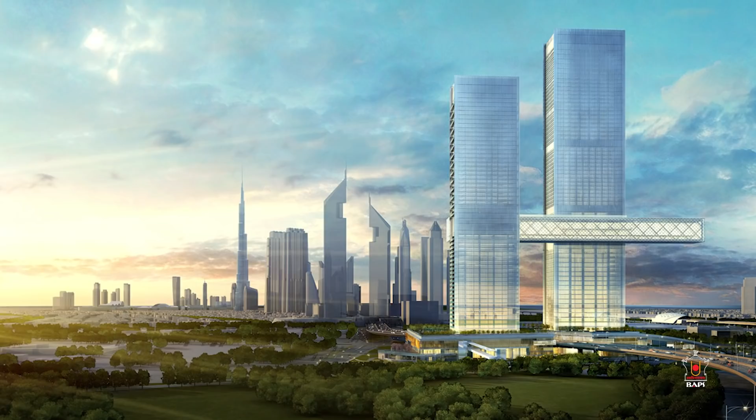The United Arab Emirates is known internationally as a land of landmarks, from the towering Burj Khalifa to the world's largest cantilever building, from cultural landmarks like the Sheikh Zayed Grand Mosque to the majestic presidential palace. The BAPS Hindu Mandir is also destined to be an iconic and historic landmark.

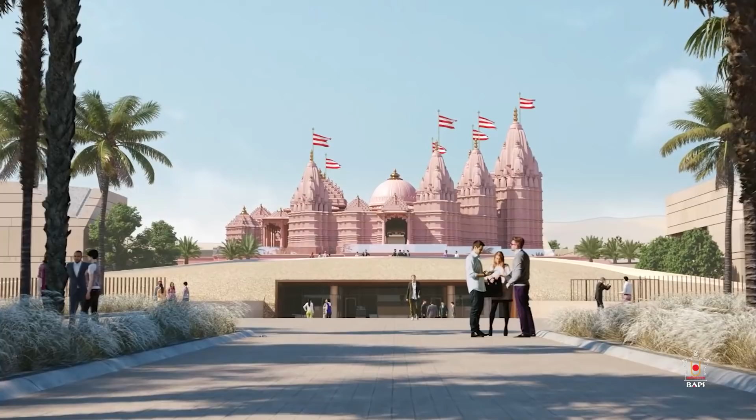The Mandir has countless stories to tell, from its inception and location to the unique fusion of ancient architecture and modern technology. Today, let's explore the foundation story, the story of a spiritual structure.

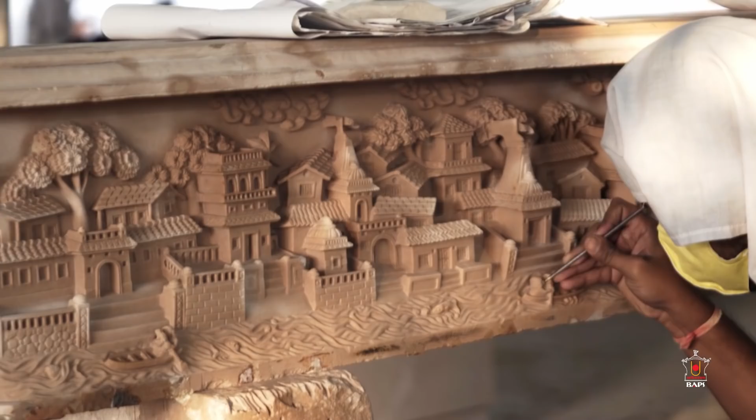The BAPS Hindu Mandir in Abu Dhabi will represent the Nagara style of Hindu architecture as according to the Shilpa Shastras. It will include 7 shikhars that will enshrine deities from the length and breadth of India. However, incorporating this ancient design with 21st century construction is a task in and of itself, and its story begins with a gift of land.

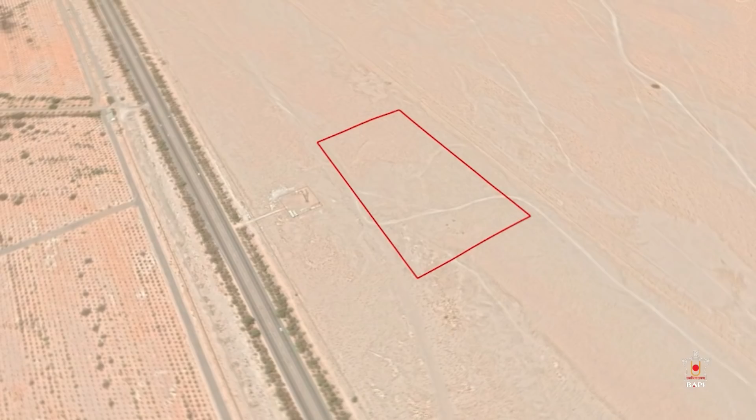In 2017, the Crown Prince of Abu Dhabi granted BAPS 13.5 acres of land in Abu Mureikha. The story of the land in itself is incredible. Initially, His Highness the Crown Prince of Abu Dhabi allotted us 2.5 acres of land in Al Watba, on the road from Abu Dhabi to Al Ain. Then, without us even asking, they increased it to 5 acres. Then suddenly we got instructions to keep everything on hold.

After a few months, we suddenly were informed that a special parcel of land has been allotted to us, 13.5 acres on the arterial road of Abu Dhabi to Dubai. Imagine, on a land we never asked for, never selected, and when we were moved almost 3 times, that land had a thick strata of sandstone, so strong and so hard that it was just 1 meter below the surface. And I was told by one of the structural experts from Malaysia, Dr. Kong, that Your Holiness, your temple will be like a small pigeon sitting on an elephant's back.

When I was there during the test, the profile of the rock actually is not flat. Such a big site, and the profile is sort of like we are standing on the backbone of something, sloping down, so that you feel like it's a backbone, and what immediately I think of is an elephant, which has such a big bone to support something. So that's what I immediately thought, yeah, we are standing on an elephant. So you're going to build a mandir on the back of an elephant like a pigeon, because compared to the strength, it's so much lighter.

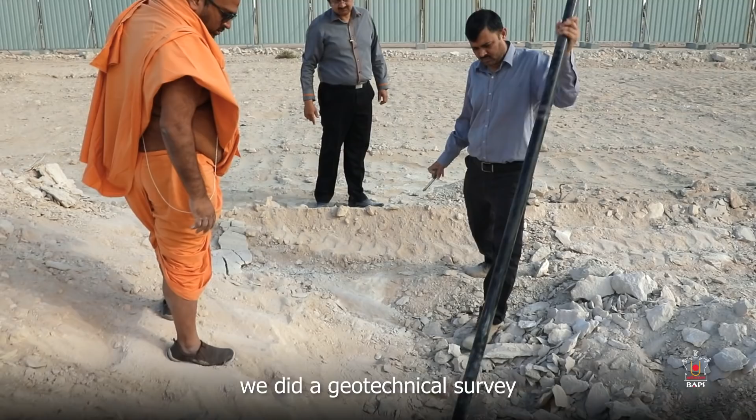When the land was first received, we had already made the original concept designs. To see if that plan would be feasible, we did a geotechnical survey, and what we found was surprising. There was a 20-meter thick stone in the middle of the plot where the mandir was expected to be built. We found competent bedrock very close to the existing ground level.

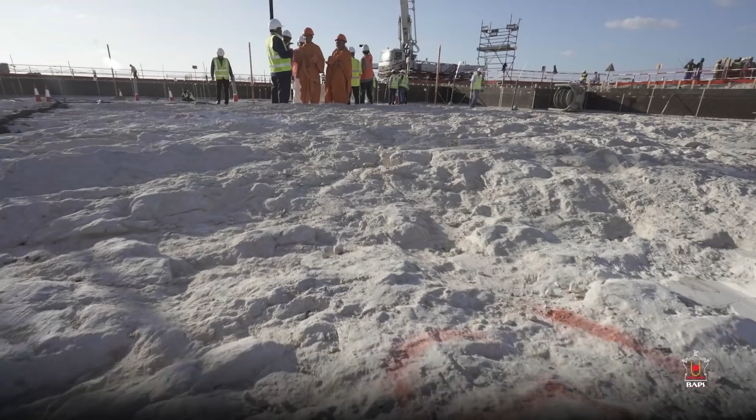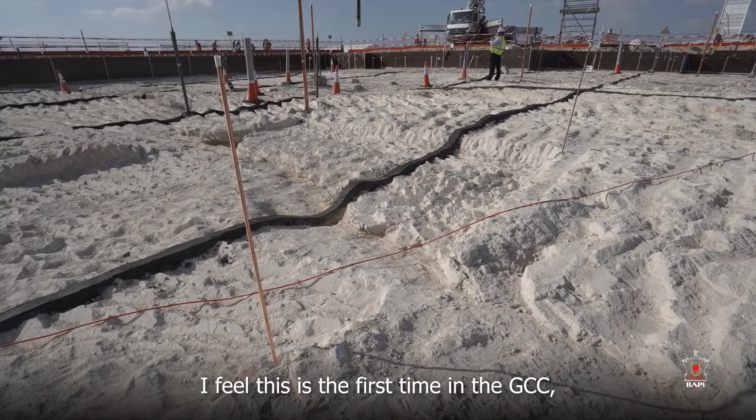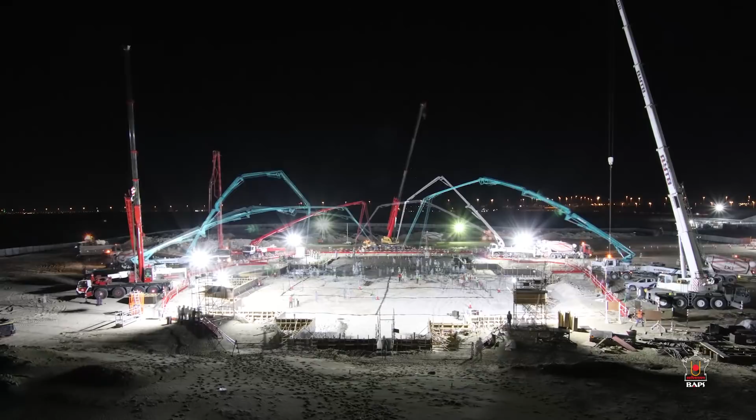When we started this project, we were really surprised, because before reaching the excavation level itself, we reached hard rock. I feel this is the first time in the GCC. More than 15 years I am working in GCC, and first time I find such a good foundation within such a limit. Once the ground was ready, it was time to start the foundation. The intent of giving the mandir longevity also reduced its environmental impact during construction.

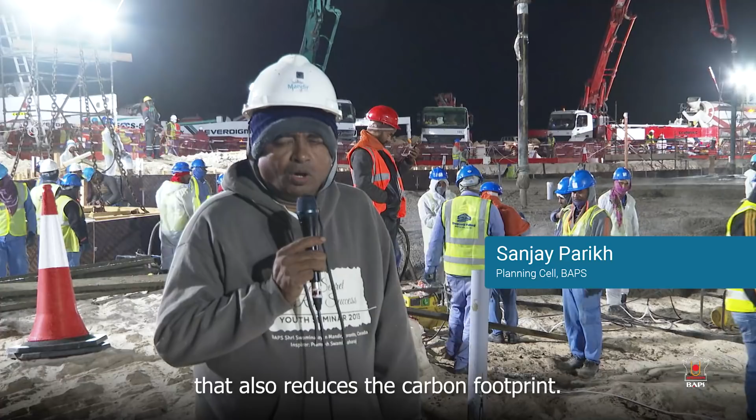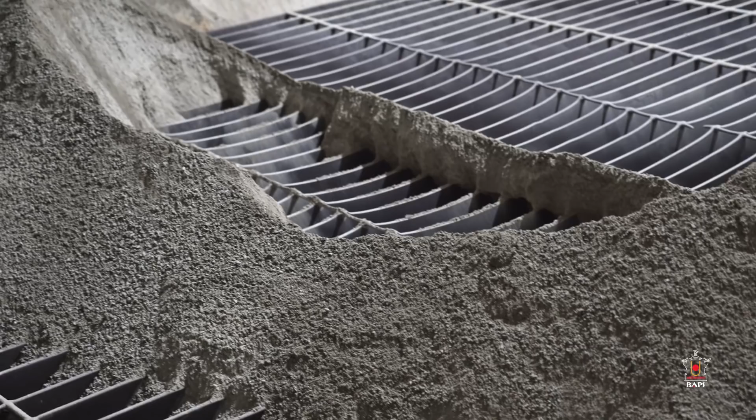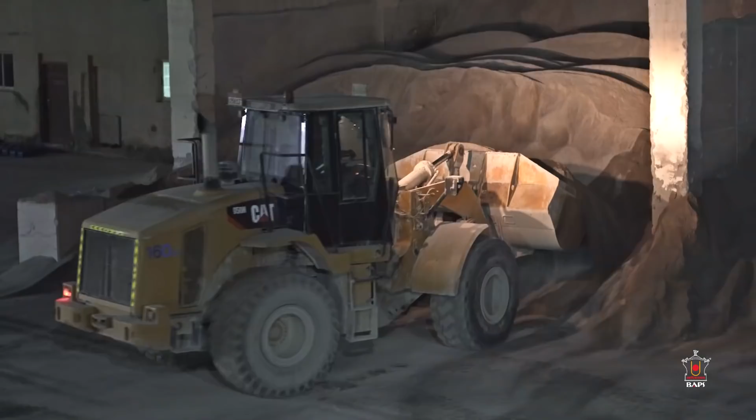The fly ash for the structure had to be of a specific grade. After thorough testing, suppliers Adani Power Plant in Gujarat and Jebel Ali Power Plant in Dubai were able to provide the material that fulfilled the mandir's requirements. The total structure of the temple will be using 12,000 metric tons of fly ash, of which we have already used 2,000 metric tons of fly ash.

With the help of local merchants and volunteers like Rajiv ji and others, we have been able to find the right grade and quantity for the mandir. However, finding the fly ash was only a part of the puzzle. This quantity of fly ash is not generally used in the UAE, and so we had to find someone who would be willing to support us by mixing the batches as our engineers needed. That's where we found Extra Mix.

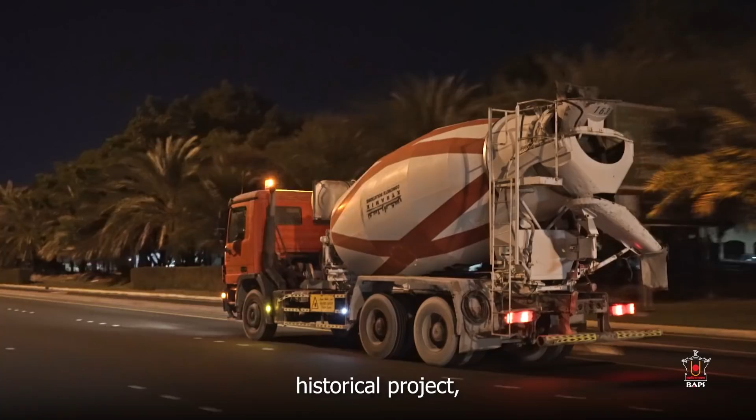We at Extra Mix are very happy to be part of this prestigious historical project, and we are very delighted and thankful to the authority for being a part of this project. The mandir's designers felt the responsibility to create a building that would last 1,000 years, and that began with the design of a 1,000-year foundation.

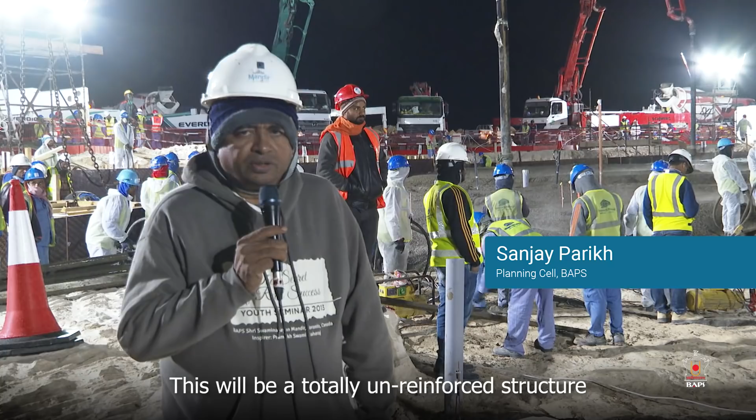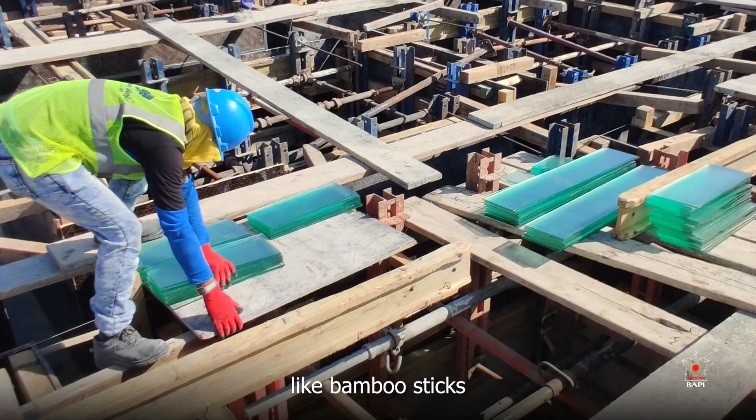We have used a very unique technology, Indian technology, that is using basic material like bamboo sticks as well as glass. Glass in vertical direction, thereby the cracks do not develop in transverse direction. Because concrete only has a compressive strength. It doesn't have a tensile strength.

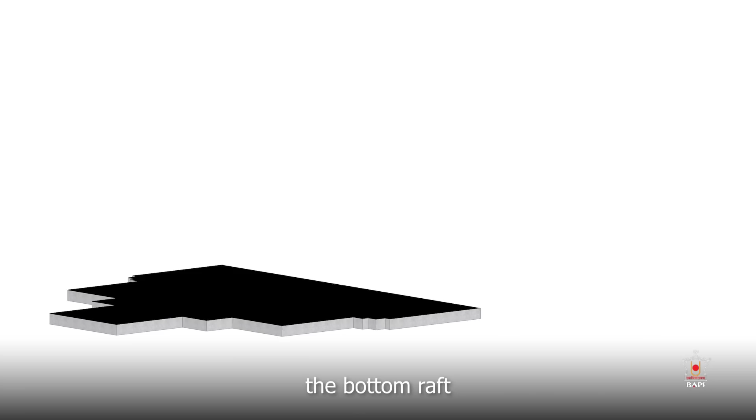So wherever the cracks are developing, these bamboo sticks and glass provide tensile strength to the concrete. This foundation, in general, we can categorize into 3 stages. The first stage is the bottom raft, which is on average 1 meter in height, and the top is half a meter in height.

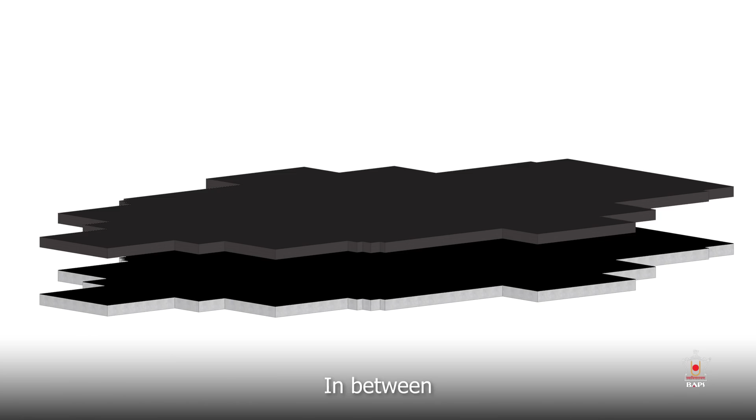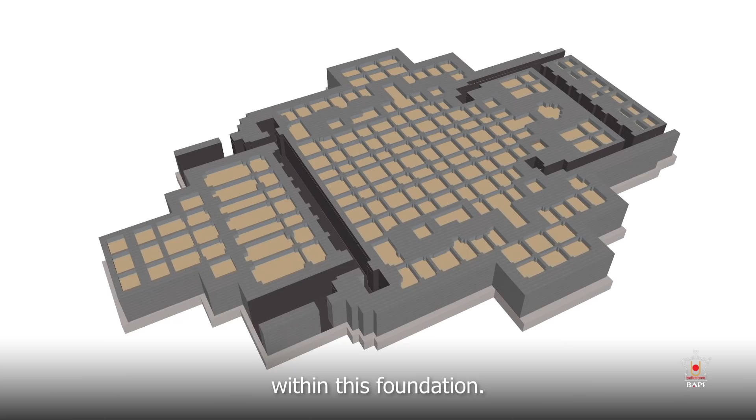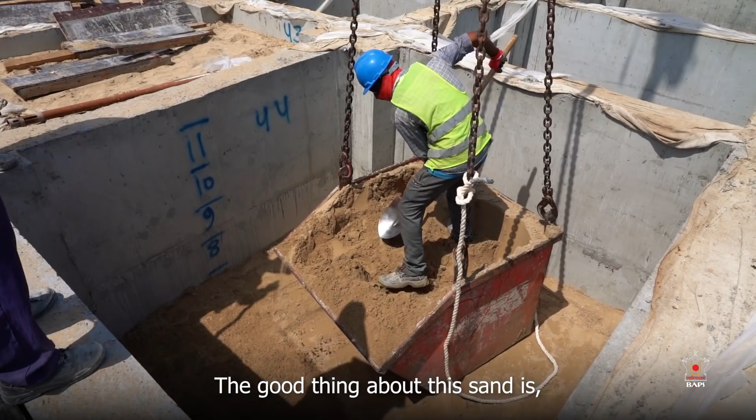In between, we have the concrete walls, which we have cast in a grid pattern, and it has created around 170 boxes within this foundation. Now, these boxes we have filled with sand, which is readily available on site. The good thing about this sand is, when we tested it in the laboratory, we found that this sand has no sulfide and chloride in it, so we can use this sand directly as a structural fill material in this foundation.

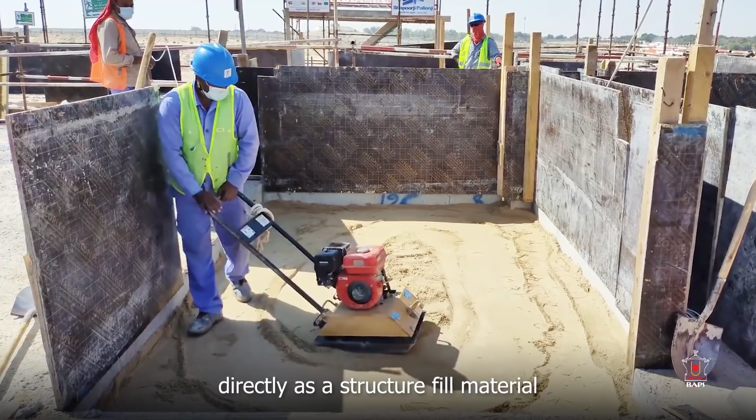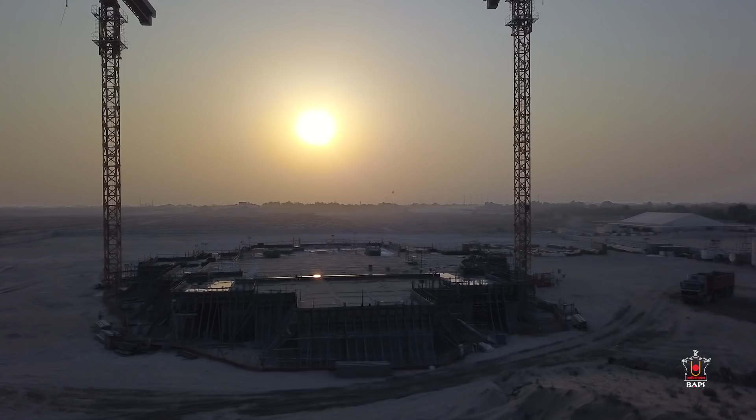While the team on the site was working away executing the box foundation, the design team came across a new challenge. The government-approved structural reviewer requested the structural design submission to be made in ETABS modeling software. This software does well with standard buildings, but is not well equipped to handle a unique stone structure with an abundance of intricate carvings and surfaces. This temple has been designed by the ancient science of building temples called Shilpa Shastra. It itself is a complete science.

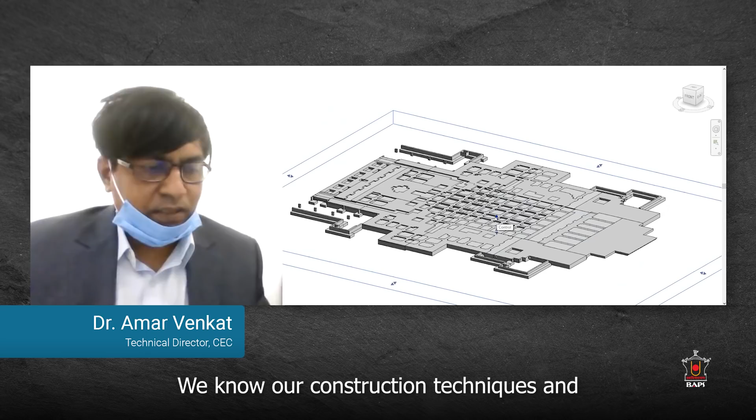But when they submitted this drawing for our review and approval as CEC, we had to make sure that the submitted design of this temple is in compliance with the authority requirements and the applicable codes and standards of this region. For this purpose, the whole BAPS Hindu Mandir team and their consultant had to build a 3D model of this temple, which is very complex because of the complex geometry of the temple and because of the material used in this temple.

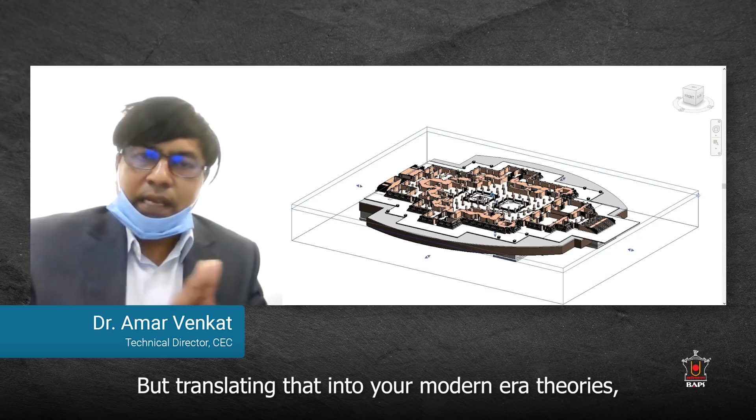We know our construction techniques and architectural principles and the ancient Shastra. We know it is right. We know it works. But translating that into modern era theories is what was intriguing for us. It's not like we draw and give it to the computer and the computer does everything. It's like solving so many mathematical equations and the results come out after that. So we ended up doing a lot of iterations.

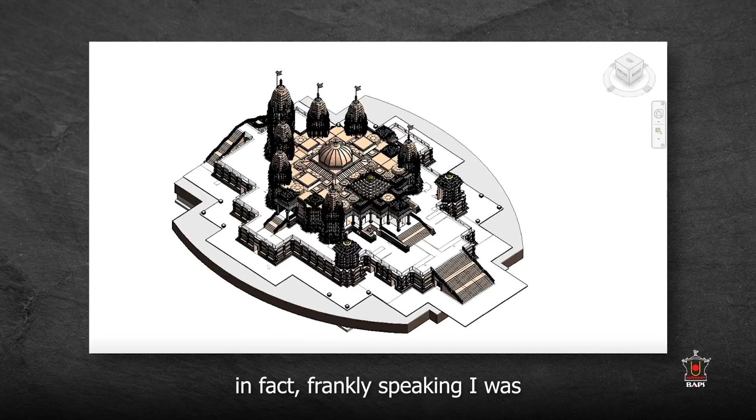In fact, frankly speaking, I was skeptical when we started the exercise. It was a revelation as we started modeling. See, modern science is more of a proof. As we moved on, we found out that some of the inherent features of the temple design, one is the wall, the way in which the wall has been arranged, were helping us a lot.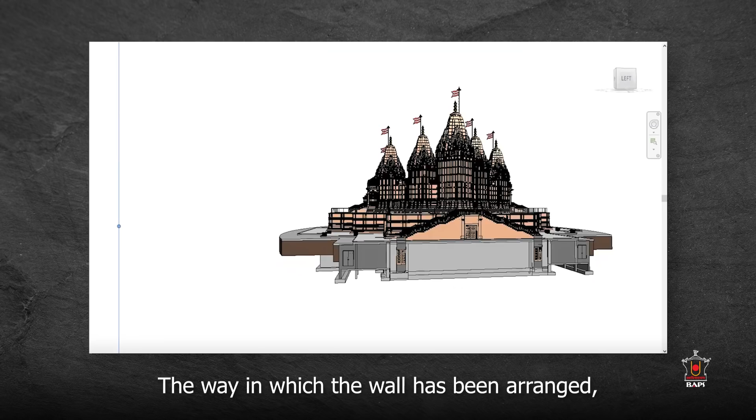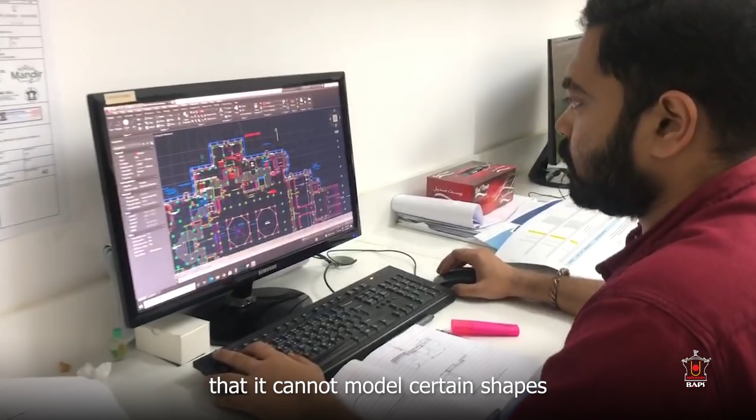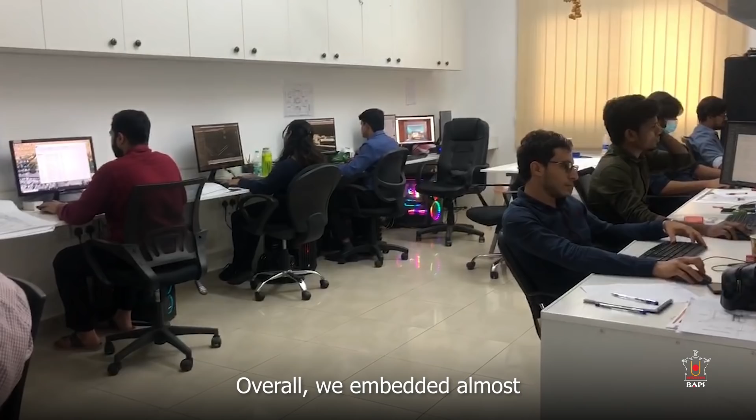We developed the computer mathematical model for the design to comply with the current code and regulations in Abu Dhabi and UAE. With almost all the software we used, we found there are limitations of the current knowledge and software that cannot model certain shapes and joints for the stone temple. We utilized an FEM model to prove this design and spent more than 2 years to fulfill the authority requirement. Overall, we embedded almost 900 years of experience to accomplish the structural design and the foundation design.

So certain software like ETABS and SAP was selected by the authority, which has limitations to design the structure. We tried to match the behavior of the structure rather than only the geometry of the structure. That is more important for us under earthquake conditions. That was the biggest challenge. So we had to use multiple software for different shapes of the elements and combine them together, and the final output is analyzed with the ETABS model to fulfill the authority requirement.

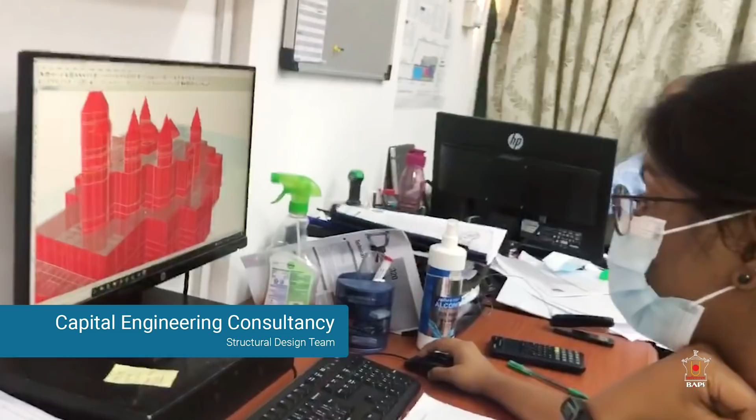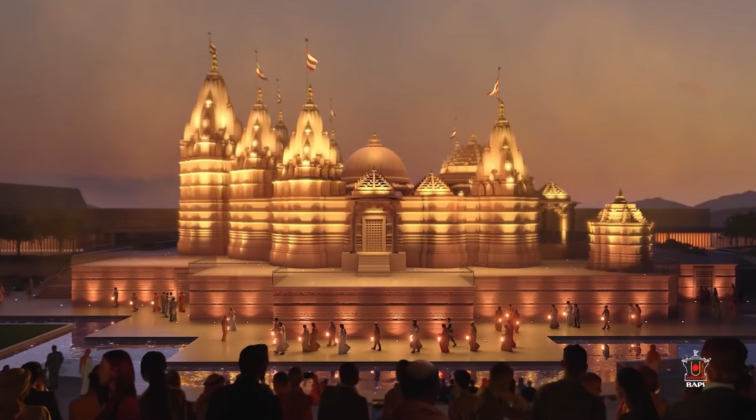In the end, with a total of 30 professionals from 10 countries and over 5,000 man-hours, a model was made in ETABS with the support of 3 additional software programs. It was the first time in history that a traditional Hindu mandir was fully digitally modeled and then put through such extreme seismic simulations. Fortunately, for the millions of people who will visit this mandir every year, it passed with flying colors.

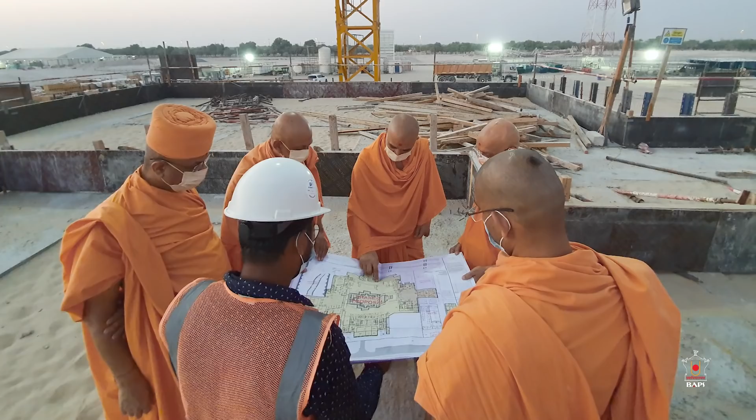But for the design team, accomplishing a historic task was not enough. They wanted to do something that would leave a legacy of knowledge for the future. So this will be the first temple in the world where instruments embedded during construction will predict the behavior and back-calculate physical parameters. That will generate a new theory for structural design, especially in stone structures.

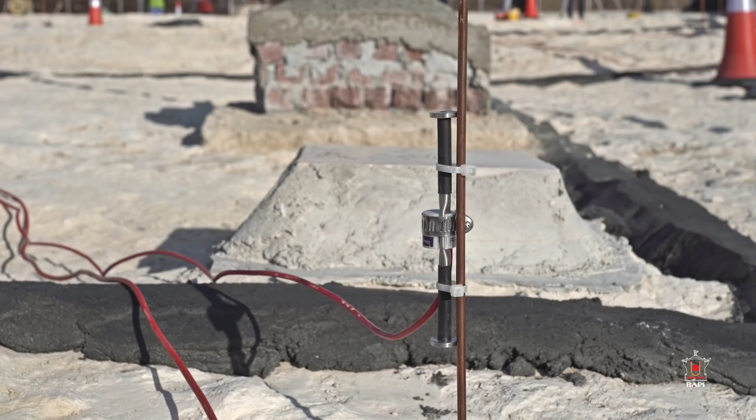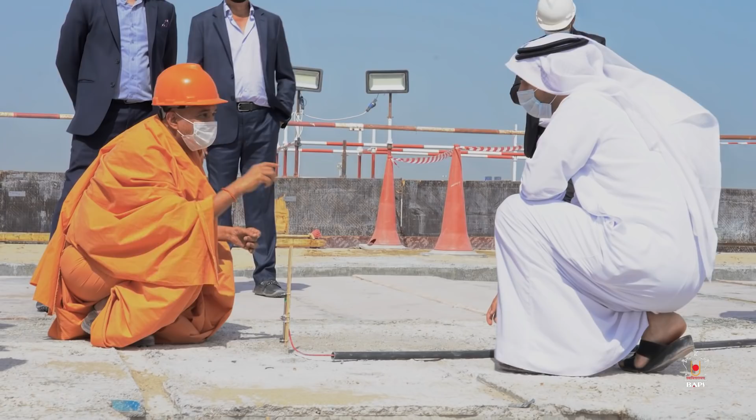300 sensors are continuously emitting live data to engineers and researchers at this very moment, and will continue to do so for decades to come. This will ratify the design, but also serve as an early detection system for structural anomalies. These sensors are already inspiring groundbreaking research. The temple has many sensors, like displacement sensors and load cells.

So beneath the structural columns, we can understand whether the construction is going well and whether the foundation performance is good during construction. If any issue is observed during construction, we can adjust the construction itself. So combining modern technology and historic knowledge, we can find the solution for the future. This is integrating our history and our knowledge from ancient times with modern technology, and that will bring us a new future.

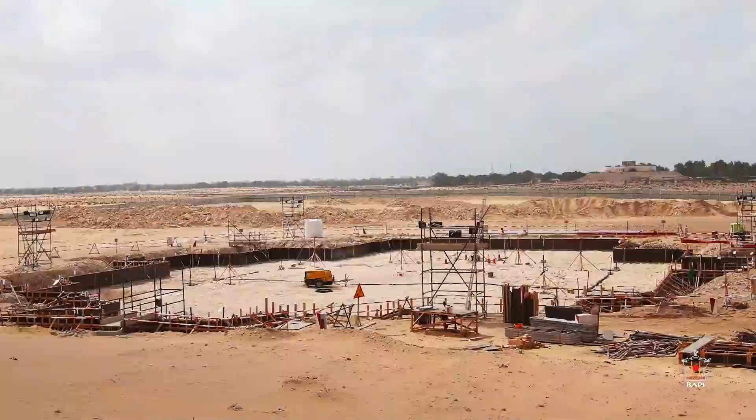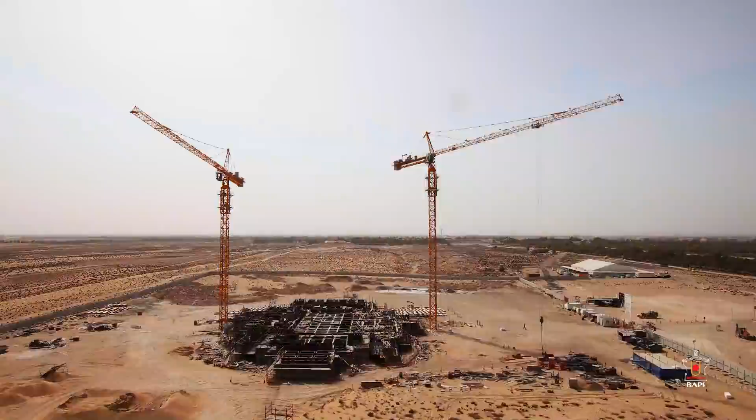There is a saying, things invisible are more important than things visible. Though the foundations of this mandir will remain invisible, they will uphold the visible mandir for generations to come. This is the foundation story of a spiritual structure.